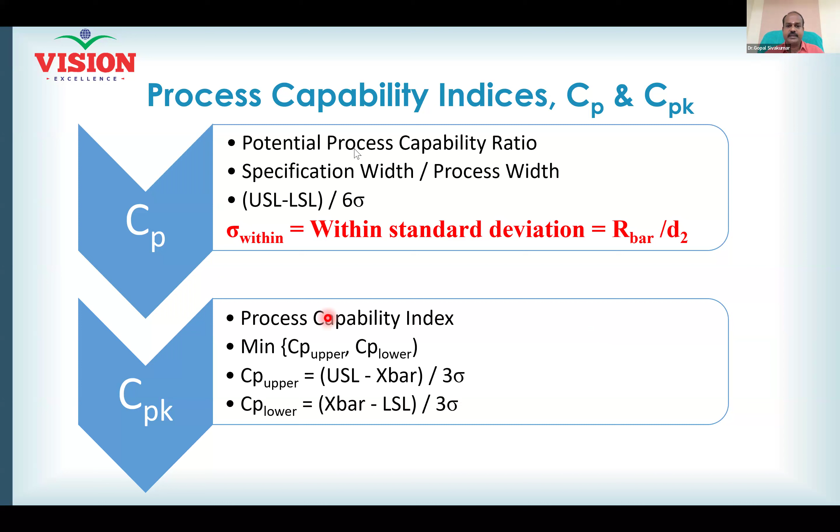If you can do anything within today, that's short term, isn't it? So within means short term. So if you are using within standard deviation, then your formulas can give only CP and CPK.

And now control limit has gone outside the specification limit. Can you see? Now process is not capable. In this scenario, CP will fall below 1.

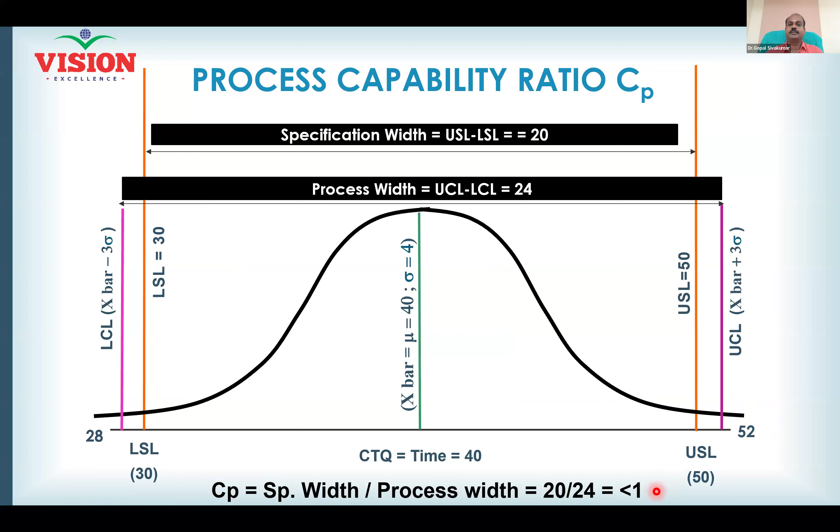And now process is capable. Why is it capable? Control limit is inside the spec. But now what happened? Not capable, because the process has got shifted. Can you see here? The process is shifting to the right side.

Now, even in this scenario, CP still gives 1.67. Since CP is healthy, it doesn't mean your process is capable. You should understand the position of your process and the position of your control limit. If my process is shifting, my control limit is also shifting.

So CP cannot be an accurate measure of capability. Please note, CP is only a potential measure of capability. What is the name of CP? Potential measure of capability. It is not an accurate measure of capability.

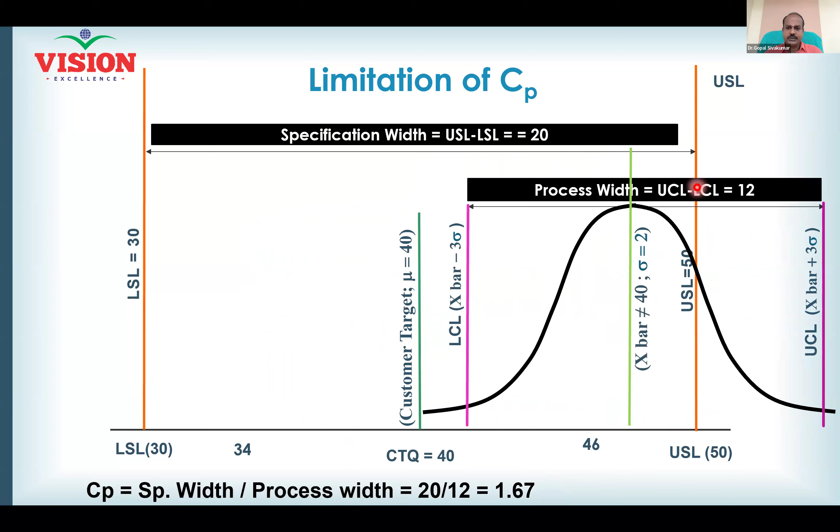So in order to measure accurately, we introduce another metric known as CPK. Here in my slide right now, I'm still showing you CP only, with the control limit overlapping the specification limit. What is the value of CP I'm getting? 1. When CP equals 1, the process is known as a 3 sigma process.

When CP and CPK are equal to 2, the process will be a 6 sigma process. Why do I call it a 3 sigma process? Can somebody answer? Because the control limits and specification limits are lying within 3 standard deviations, right and left.

Very good. Because both my control limit and specification limits are overlapping. In that scenario, the distance between the center of the process and the nearest specification will be equal to 3 times standard deviation.

Imagine this upper spec and this lower spec represent the size of the door, the size of the door in your house.

And imagine a person wants to enter through the door. He must be leaner than the door, yes or no? Yes. If he is bigger in size than the door, he can't enter.

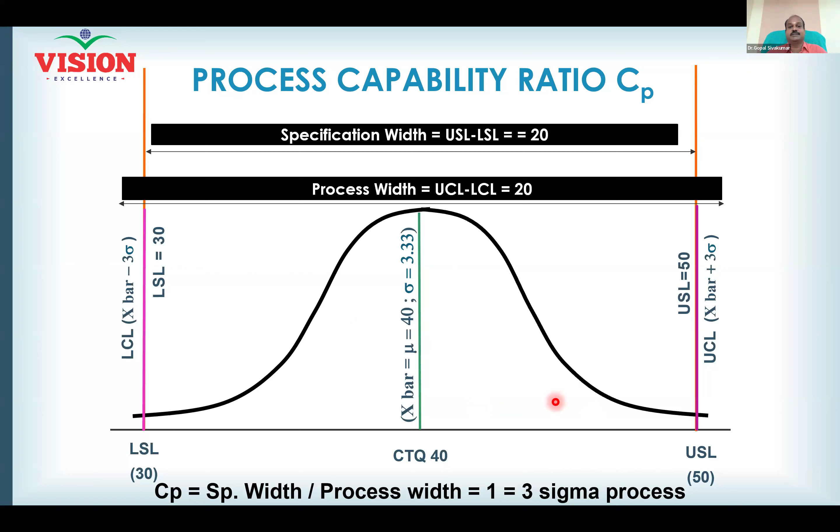So when I say person, I refer to 1 standard deviation. Your process standard deviation talks about the size of your process. Clear? Okay, so now it is about CPK.

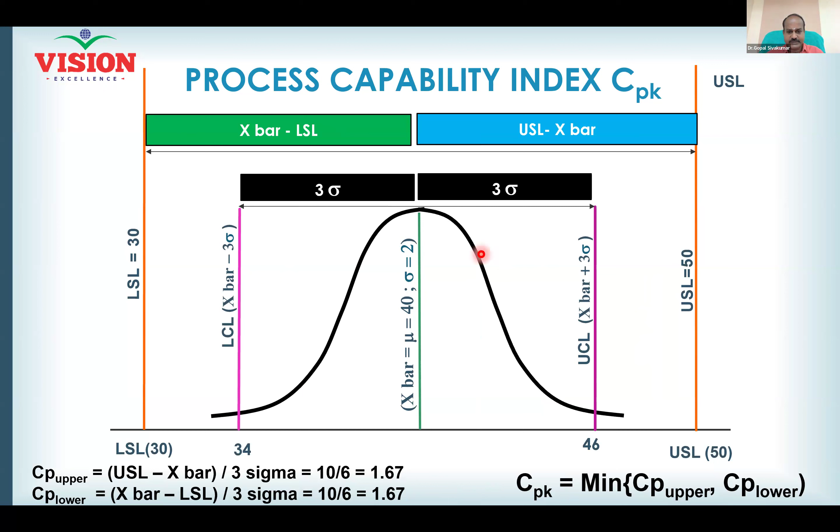When it comes to CPK, what we do is check whether our process is shifting to the right side or left side. When the process is not at all shifted, CP and CPK will give the same value. You can see process is not shifted, now CPK is found to be 1.67, CP will also be 1.67. But when my process is shifted, CP will still remain at the same value, but CPK will drop.

Can you see here? CPK means minimum of CP upper or CP lower. CP upper means the formula: USL minus X bar by 3 sigma. CP lower means X bar minus LSL by 3 sigma. So I get 2 different values for CPK. When you have 2 different values, you have to choose the minimum.

Which is the minimum here? 0.8. So CPK is 0.8, clearly confirming that the process is not capable in the long term.

The process is not capable according to the data, even in the short term. CPK gives a realistic estimate of the capability, not CP. CP fails to detect the shifting of the process, but CPK can even capture the shifting of the process.

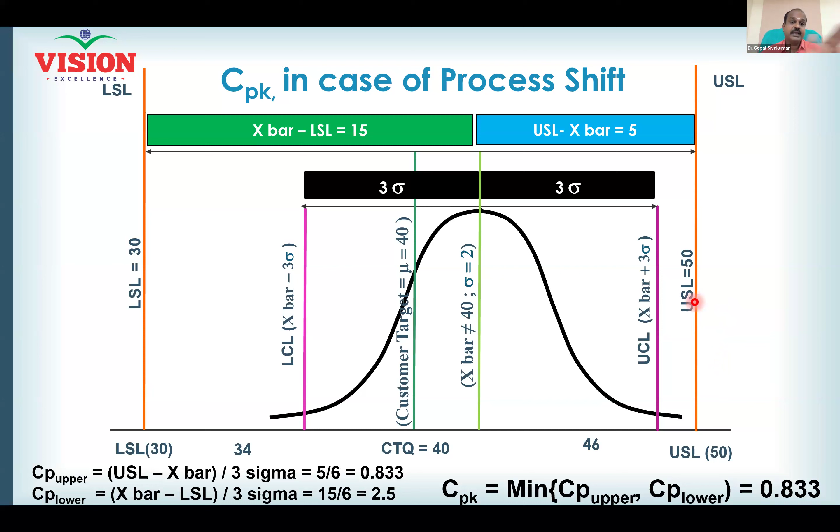All of you, do you understand why we need CPK? CPK measures the spread of the process and also the shift of the process. All right, so these are the conditions to be fulfilled.

First of all, this is the condition: CPK must be more than 1.67. If CPK is more than 1.67, you can declare the process to be capable. And if CP is more than 1.67, don't declare the capability without looking at CPK.

Then what can you do with CP? What you can say with CP is you can declare that your process is stable or consistent. If CP is more than 1.67, your process is under statistical control. Your process is consistent, your process is stable. You can use all these words: stable, consistent, statistical control. But in order to use the word capable, CPK must be more than 1.67.

If you have very good control, then you know what will happen: you will see that CP equals CPK. In an ideal scenario, your actual capability will be equal to the potential capability. So you can always aim for fulfilling this condition - what is this condition? CP can be equal to CPK.

If you look at, suppose it happens to refer to a CPK value, CP equal to 1.87 and CPK equal to 1.37. What is your understanding now? CP equal to 1.87, but CPK equal to 1.37. Can you see a difference of 0.5?

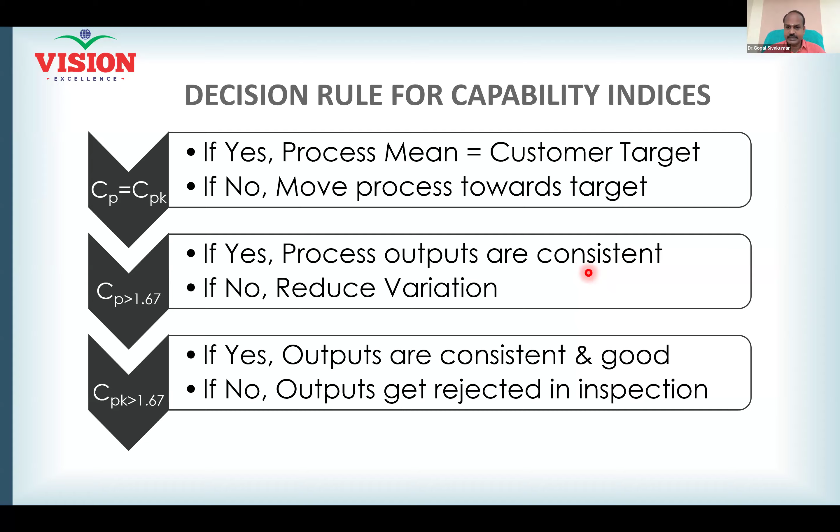And now some calculation example. You see, this is upper spec and lower spec given. It is an electronic manufacturing company. Current flow specifications are given as 100 plus or minus 10. So upper spec is 110, lower spec is 90.

And the process average and process standard deviation are available, and that leads to a CP of 2.22. But for the same data, CPK I get is 2... which one should I choose? The smaller one, so 0.66 is the CPK.

That means my process is capable or not capable? Not capable, not capable. And CP is not equal to CPK, so that means my process is shifted. So the action required is I should shift the process average towards the target.

And when I look at my CP, it's looking great - no action is required with respect to the variation. Process is under perfect control, but only thing is it is shifted. All right, and finally I look at CPK, which is very poor.

So what action do I need? I refer to the previous understanding - so I know that no action is required with respect to CP. So what action is required? I should only have to move the process mean towards the target.

But how can you move the process mean? You have to figure out. Suppose imagine our students' average marks standard is 80, but you all happen to achieve an average of only 65. What happened to my process mean? Shifted downwards, am I right?

Now I want to move the average towards the target of 80. Now what should I do? What should I do? I want all of you to score more - then only my average can move up, isn't it? Now what should I do?

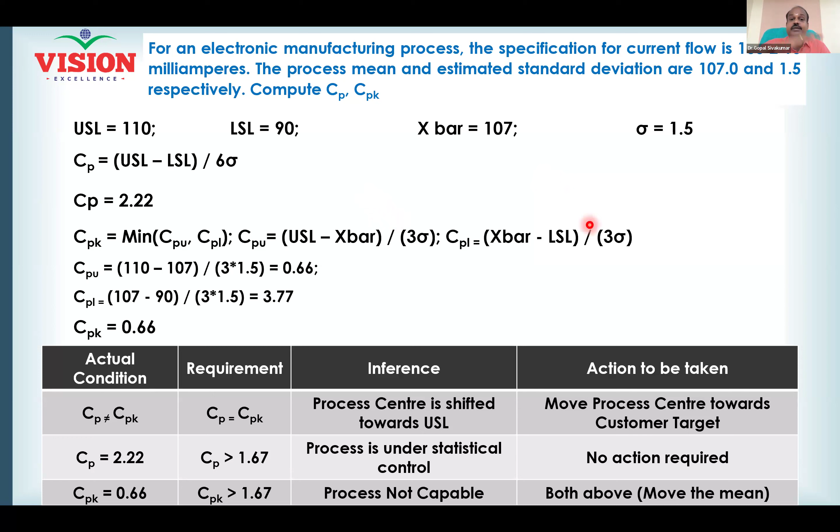I should increase the number of hours of the set classes. Probably the exam, mock exams - I should give more mock exams. Yes or no? So all these things can definitely push my average. So what needs to be done at your place, you need to understand.

Now another scenario, I'm not going to read out this, where CP equal to 1.11 and CPK equal to 0.666. Now what is your understanding? Both are under trouble now.

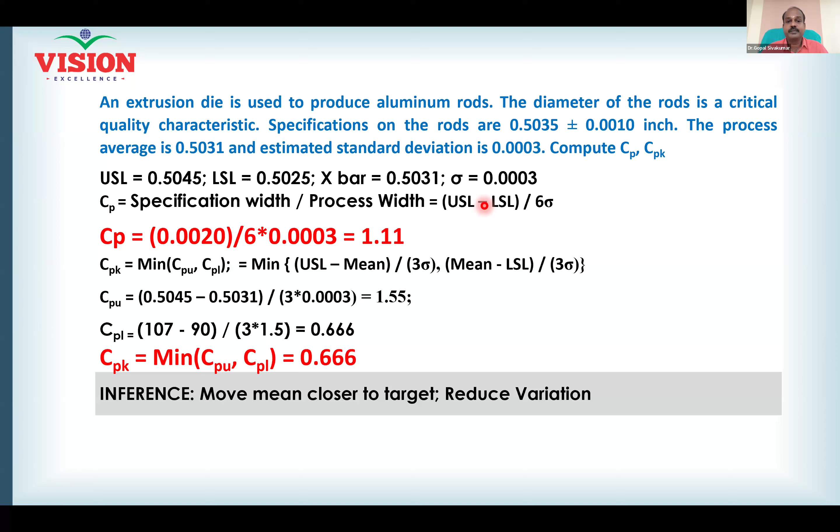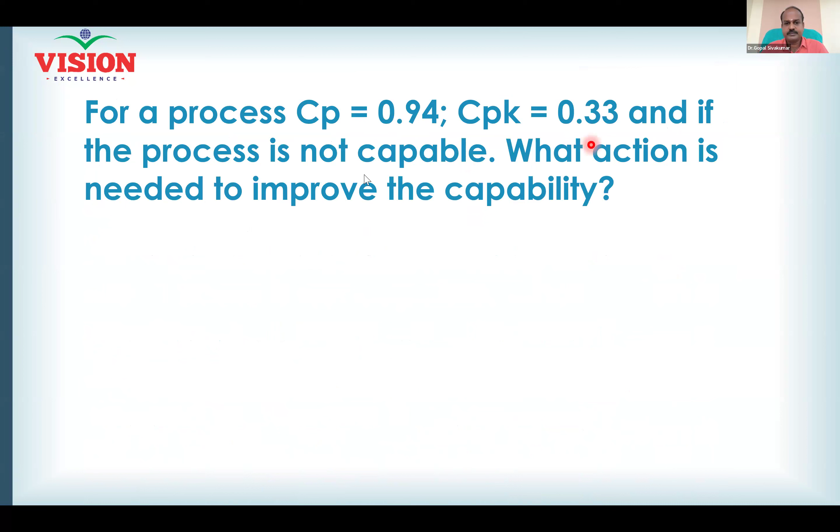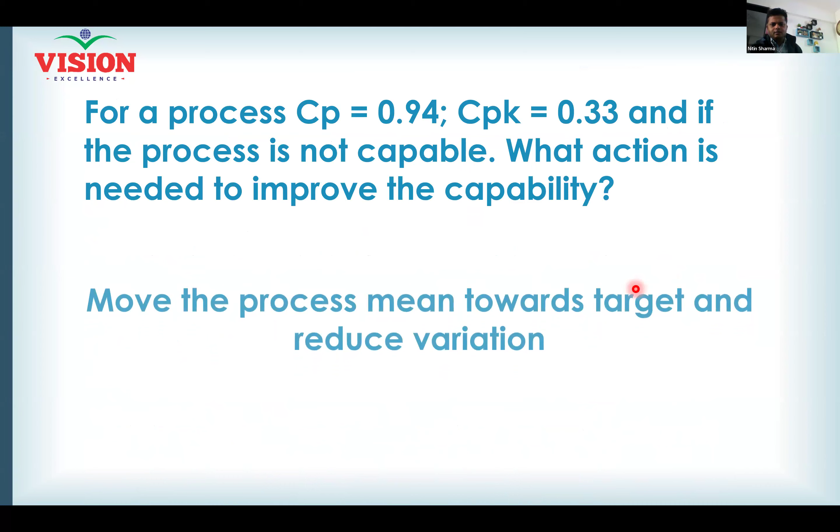What should I do? I should move the mean and also reduce variation. Very good. So now what is your recommendation as a consultant, as an expert? CP equal to 0.94, CPK equal to 0.33. What is the suggestion? Process is not capable. We should reduce the variation and also move all the readings near the mean. Move the mean towards the target. Very good. So you know everything about CP and CPK.

Now we just move on to PP and PPK. I'm showing two different cricket players. One is Shikhar Dhawan, the other one is Sourav Ganguly. Both are left-hand batsmen, both could hit well. But if you really want one of them to play for India, whom would you prefer? Shikhar Dhawan or Sourav Ganguly?

Shikhar. It's difficult, but if tomorrow's match is very important, Shikhar Dhawan is the right choice. Why? Because he is not only capable of hitting, his physical fitness is also good. In addition to the capability, past record, his current fitness is also important. So PP and PPK measure the current fitness also. Please understand.

Okay, and now for PP and PPK, look at the formula. Formula wise same, can you see? USL minus LSL by 6 sigma, that is the formula for PP. Again, similar to CPK, for PPK also you have PP upper, PP lower. What is the difference? The way we calculate the standard deviation is the difference. Earlier, what was the formula I gave you for CP? Within standard deviation, R bar divided by D2. Do you remember that? Yeah.

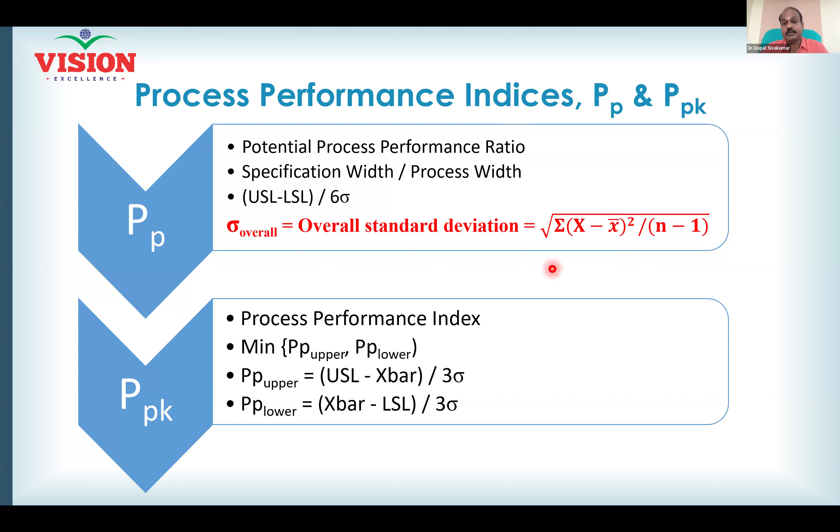But now I don't want you to use R bar by D2. I'll tell you what R bar is and everything, but now you should use this, which is known as overall standard deviation. Whenever you use overall standard deviation, you get PP, PPK. Whenever you use within standard deviation, you get CP and CPK.

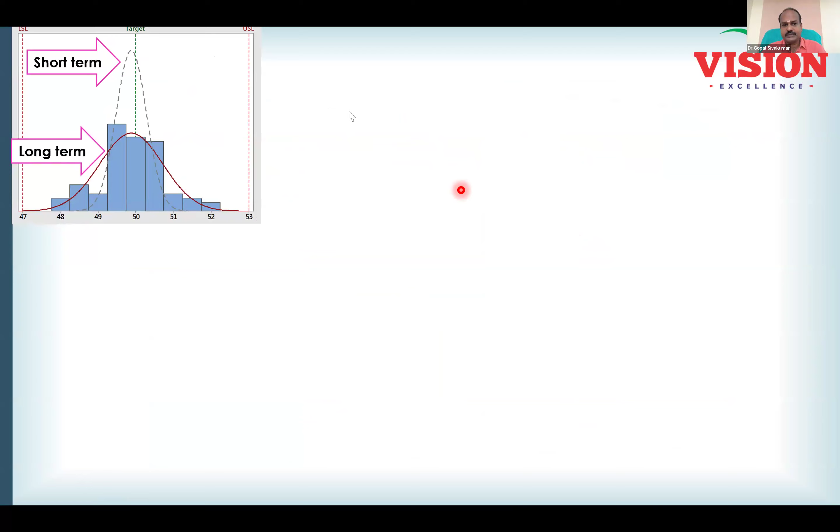And now the capability definitely depends on two things: the position of the center of the process and the variation in the process. Based on this, there are two types of capability: short-term capability and long-term capability. How can I calculate short-term capability? Using within standard deviation. How can I calculate long-term capability? Using overall standard deviation. Within the short term, we have some different standard deviation. I don't want to confuse you with too much information, so focus on understanding the within and the overall. Later we'll talk about these two, preferably at the MBB level.

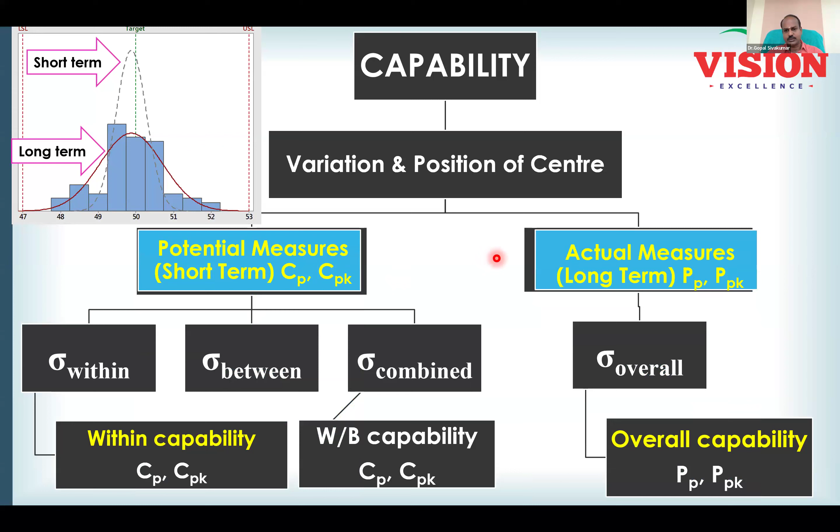So now if you use within standard deviation, you get within capability - this is normally referred to as CP and CPK. If you use overall standard deviation, you get overall capability - this is what we normally refer to as PP and PPK. The performance indices are here on the right side, the capability indices are here on the left side. Sometimes we call CP, CPK as short-term measures and PP, PPK as actual or long-term measures. Now here is the formula.

Now we are going to look at a case study. Prior to that, please note, whenever you want to conduct a capability study, make sure your process is under the state of statistical control. Then only it is advisable to conduct the capability study. What is the requirement I'm telling you? If you want to calculate CP/CPK and PP/PPK, the prerequisite is your process must be under the state of statistical control, which means if you plot a control chart, all the points should appear inside the control limit. If that is not happening, conducting a capability study cannot be accurate.

Imagine a USL and LSL - no, control limit. In a control chart we refer only to control limit, not USL, LSL. So in the control limit, if all points fall inside, then your CP/CPK and PP/PPK can be accurate. Otherwise they will be inaccurate. What are you going to do with inaccurate CP/CPK and PP/PPK? Useless. So don't fall into that situation. Always check whether the control chart is healthy. If the control chart is healthy, conduct a capability study.

Imagine right now how many people are attending the meeting? It shows 21, isn't it? Yes, and the batch size is somewhere around 35. Now how many people are absent? 14. Now tell me, do you want to allow the 14 candidates also to write the exam? Strictly speaking, should we allow or should not we allow? Strictly we should not allow, because they have not attended the class. They are not in proper control.

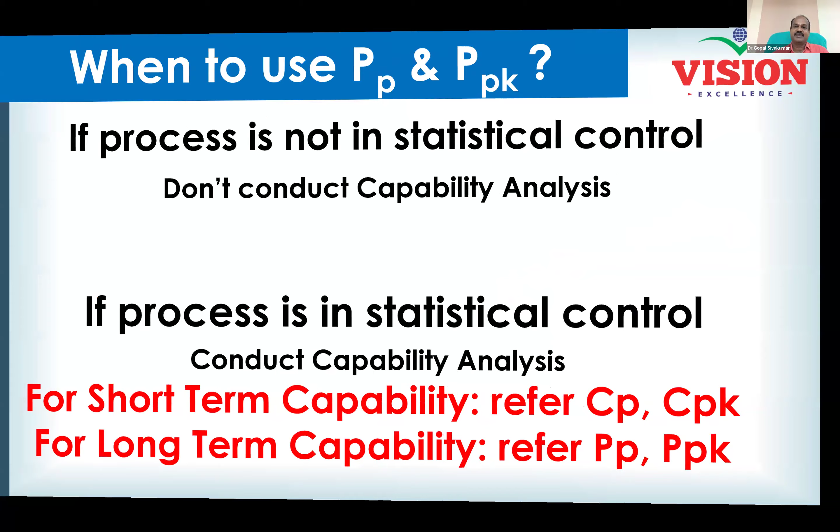If you are having the habit of scoring above 90, absolutely you don't have a chance of failing at all. We are not talking about passing and failing. We are now talking about the toppers, whether I can be a topper or not. We never fall into the category of passing or failing.

Now, one case study here. A company has to produce parts. The process is coating. A layer of coating is required, and after coating, the coating thickness must be 50 microns. What is the target? 50 microns. Customer gives a specification of plus or minus 3, so 50 plus or minus 3 microns. Very narrow spec. What is the upper spec now? 53. Lower spec is 47. Now you have to have a very, very effective level of control so that your products can always stay inside the specification.

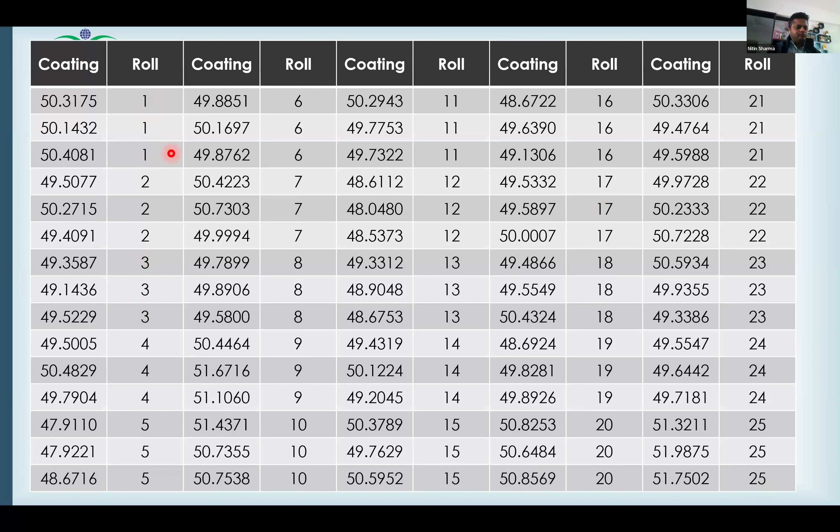So now you are collecting data. See here how the manufacturing is happening. The raw material comes in the form of a roll. Once a particular roll is loaded, you are able to produce 5,000 parts. One roll can give you 5,000 parts. Once the roll is exhausted, you have to load another roll, roll number 2. Can you see the roll number keep on changing? 1 to 2, 2 to 3, 3 to 4. That means you consumed 25 rolls. Totally, how many parts do you produce now? 25 into 5,000. So totally, 125,000 parts you produced.

Now, in this scenario, you want to know your CP, CPK and PP, PPK. So now, please note your data collection plan. Now, loading 25 rolls, how much time it might take? Imagine, and now 25 rolls were processed. This is a considerably good period of time.

Your data is collected. From every roll, you have taken 3 samples. Can you see here? Every roll, you have taken 3 samples. The 3 samples taken together from every roll is known as a subgroup. So 25 rolls, you have 25 subgroups of data. Each subgroup has got 3 samples. The 3 is known as subgroup size. Totally, you have 75 data. The 75 samples represent 125,000 parts.

If there is a problem with the 75 samples, there is a big problem with 125,000 parts. Am I right? Yes. If there is a problem with the average of the 75 data, definitely there is going to be customer complaints in the 125,000 parts. So the overall average is very crucial for you. All of you agree with me?

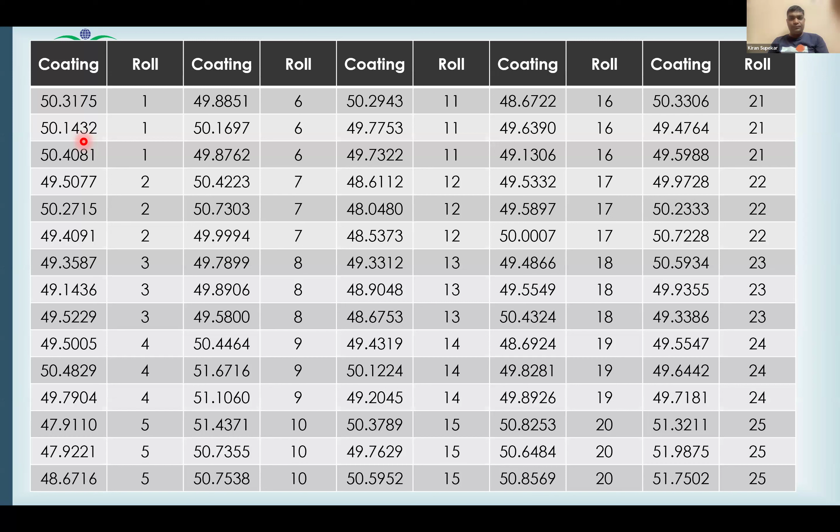Moreover, if you look at the subgroup, you only have 3 data. Please note, you don't have much. When you have lesser number of data, in the control chart itself we have taught you: when the number of samples is less than 8, you go for X bar R chart. Am I right?

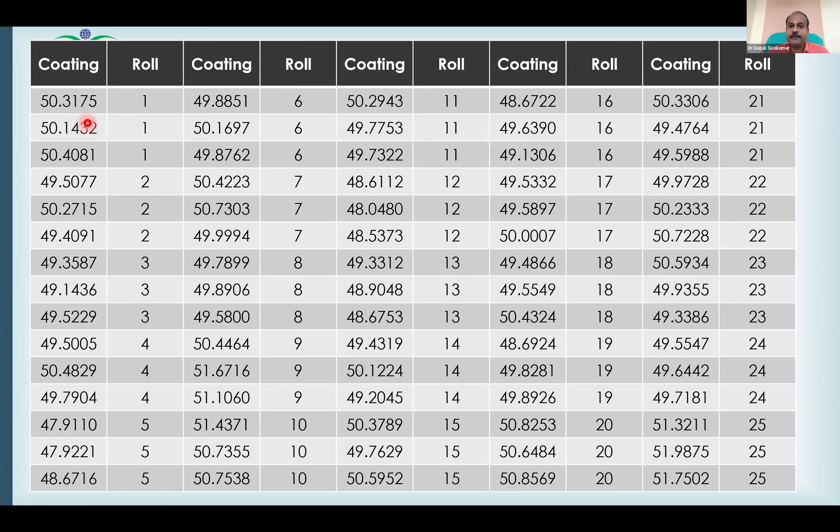Same manner, in order to understand the variation, calculate range, not standard deviation. After calculating range, you can convert the range into standard deviation. All of you are with me so far? The formula used to convert range into standard deviation is R bar divided by D2. What is the formula? R bar divided by D2. That's all, now we proceed with the calculation.

Number of subgroups equal to 25. Subgroup size equal to 3. Total number of data, 25 into 3, 75. Now for every subgroup, calculate the range. Formula for range is maximum minus minimum. How many ranges are possible? 25 ranges are possible, am I right? Yes sir. This is known as subgroup range.

With the 25 ranges, can you find out R bar by D2? R bar is summation of all the ranges divided by 25. Can you do this? Simple, no? Yes sir. Now R bar is available. Now what is D2? D2 is a statistical constant, a table is available.

For a subgroup size of 3, the value of D2 is tabulated as how much? 1.693. Up to a subgroup size of 25, D2 is available, you don't have to worry. Even though people say go for a sample size of 30, the normal practice is up to 25 only, and that is tabulated.

Now use this 1.693 to convert your ranges into standard deviation. The resulting standard deviation is known as within standard deviation. All of you understand how to calculate within standard deviation? Yes. The within standard deviation actually talks about what is happening inside the subgroup.

Clear? Now, if you use this within standard deviation, you will get CP and CPK. Look at your CP, CPK. You all know the formula. What is the formula for CP? USL minus LSL divided by 6 times sigma.

But in the place of sigma, which value should I substitute now? 0.4139. Substitute 0.4139 and I will get a CP value of 2.46, CPK value of 2.37. Extremely healthy, am I right? Yes sir, no rejections. I can't see any rejections out of this; in each of the 5,000 parts, there is no rejection at all.

How many of you agree with my statement? I agree sir, because I have a very good CP-CPK value. Very good. And now I want you to calculate overall standard deviation. If you want to calculate overall standard deviation, how many data points do you have?

75 data points. Simply type all the 75 in Excel, single column. Calculate the standard deviation, and now look at the standard deviation, how much it is? 0.8384. In comparison to the within standard deviation, can you see what happened?

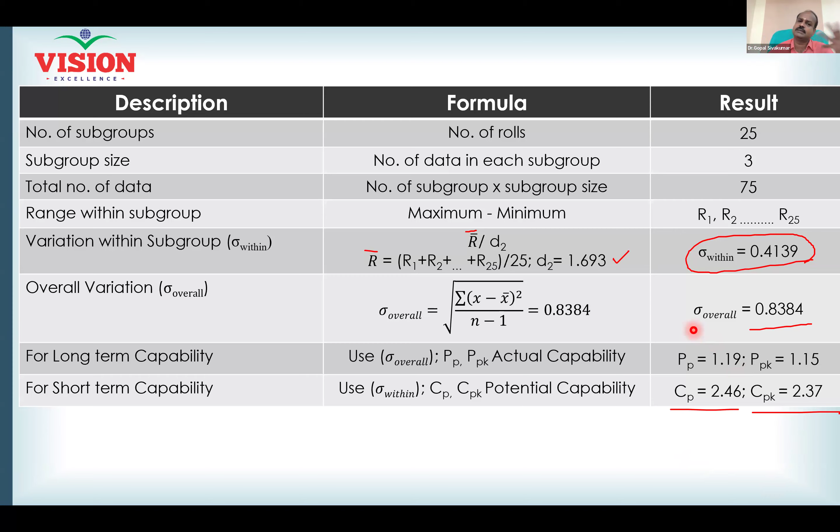Now, will you conduct a capability study? You are not supposed to, isn't it? According to the understanding now, you are not supposed to conduct the capability study. Why? Because the results are not going to be accurate, they will be inaccurate, isn't it? Yeah, they will be inaccurate.

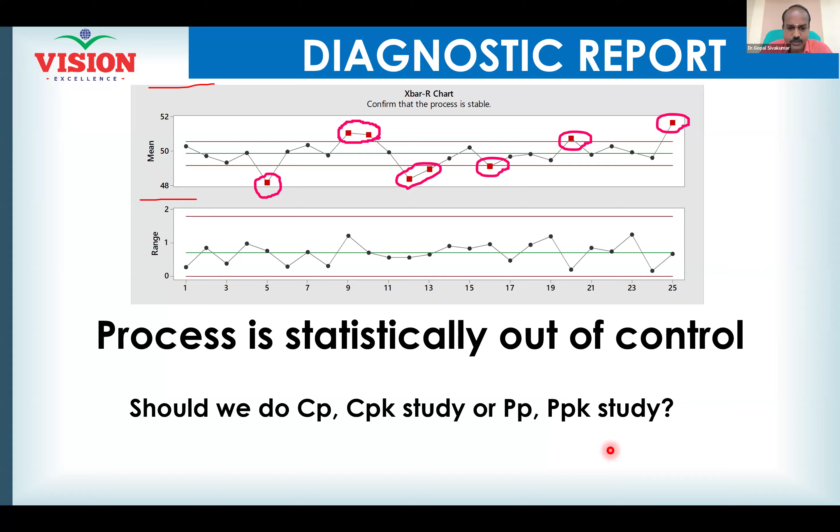That's the message. Now this is the Minitab report for the same set of data you see here: 1.19, 1.15, 2.46, 2.37. Everything we did manually, we got the exact result. A process operating in this manner currently, you see a good control.

Can you see here? Good control, the dotted line. But in the long run, gradually it is stretching outwards. The control limits are moving outwards, and that's the red color one. Red represents long-term performance, the dotted line represents short-term performance. Both of them are more or less inside the spec only.

But the tendency to cross the LSL on the left side is very high, and that's why you see the PPM of 393 is expected. Currently, PPM is how much? Zero, because of higher CPK. But in the future, PPM is expected to be 393. If you can't tolerate this 393, you must establish better control. Bring additional control into the process so you can avoid the 393. Otherwise, you have to face this 393 ppm. Clear?

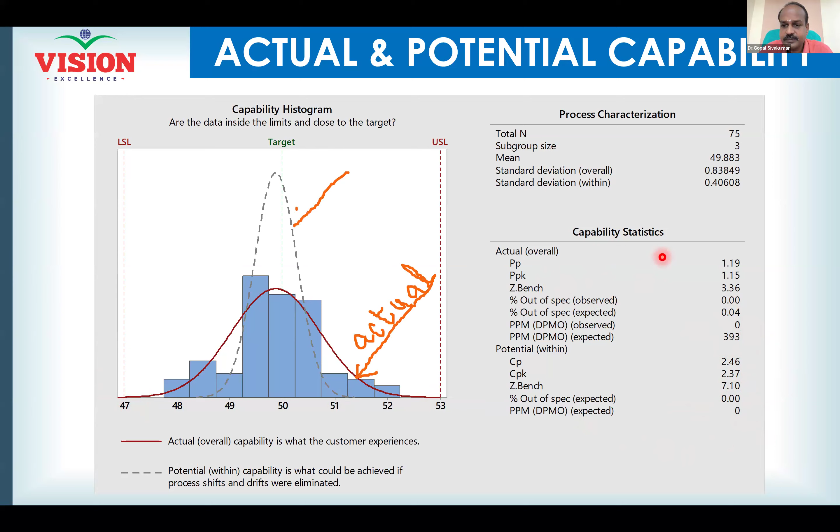Now, do you understand what is CP, CPK and PP, PPK? The same thing in another format - I will show this in Minitab so that you will understand. Likewise, for any scenario, any kind of data, whether it's about coating thickness or diameter, you can certainly do the analysis. Just 2 minutes in Minitab will show you how you can conduct the case.

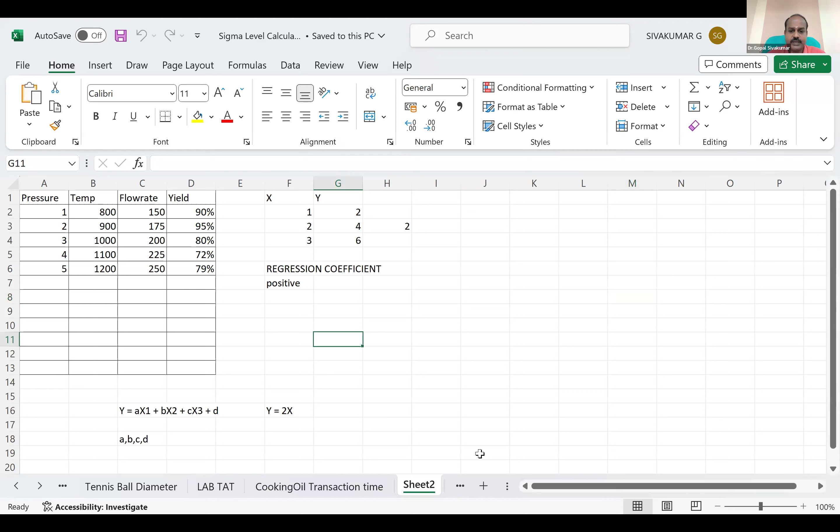So I'm just showing the Excel file. All of you, can you see the Excel file? This file I've already shared with you - the Sigma level calculator, hope everybody retains that. It contains a lot of data, so I want to refer to the data which I currently discussed with you. The file name should be coating thickness. Let me check - can you see coating thickness, all of you?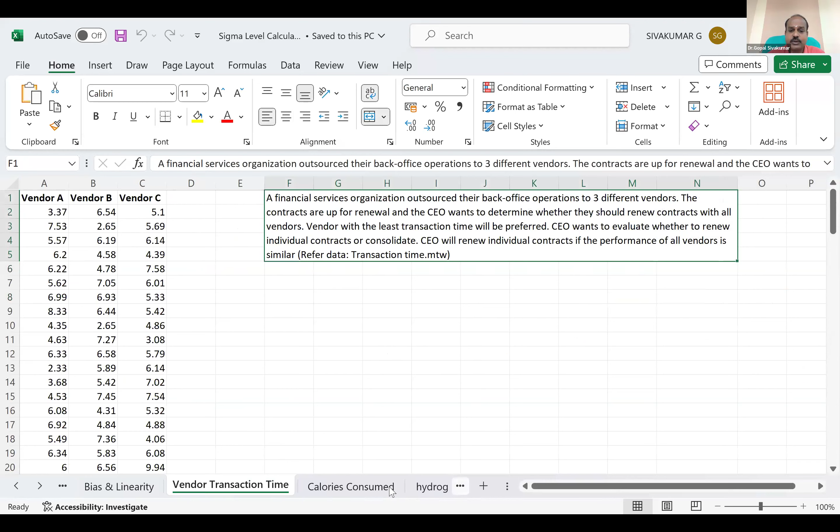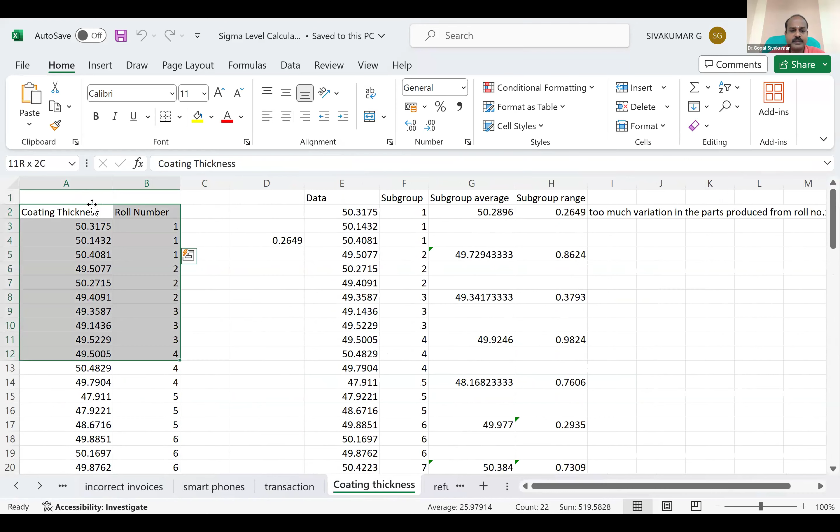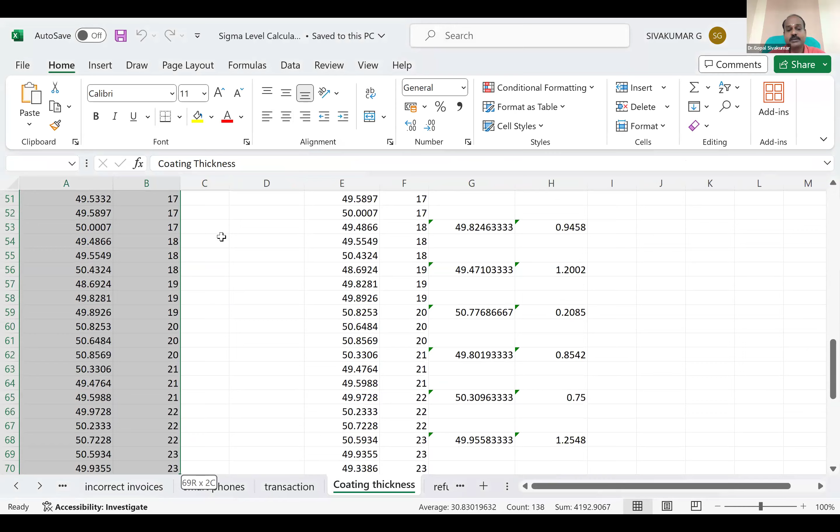Yeah, see here, the 75 data points are available here - coating thickness with roll number data. All the calculations I have done manually. All of you can check and understand, try to understand how the calculations are done manually. But right now, what I'm going to do is just select the data points.

Let me share with you the Minitab. You can see the Minitab screen now. I'm just pasting in here - oh sorry, let me paste in the gray bar. So coating thickness is available in column 1 and roll number available in column 2. There are 75 data points. So what I do is I just go to Stat.

I just go to Quality Tools - can you see a capability analysis? Stat, Quality Tools, Capability Analysis, and choose Normal. Can somebody read the description? 'Determine how well your process output meets customer requirements when your data are reasonably normal.' Very good, I click that.

And now where is my data? Data arranged in single column, which is C1 - double click. Subgroup size is available in C2. Now your lower spec - what is your lower spec for the problem? 47. And upper spec, 53. You give this information and then give OK.

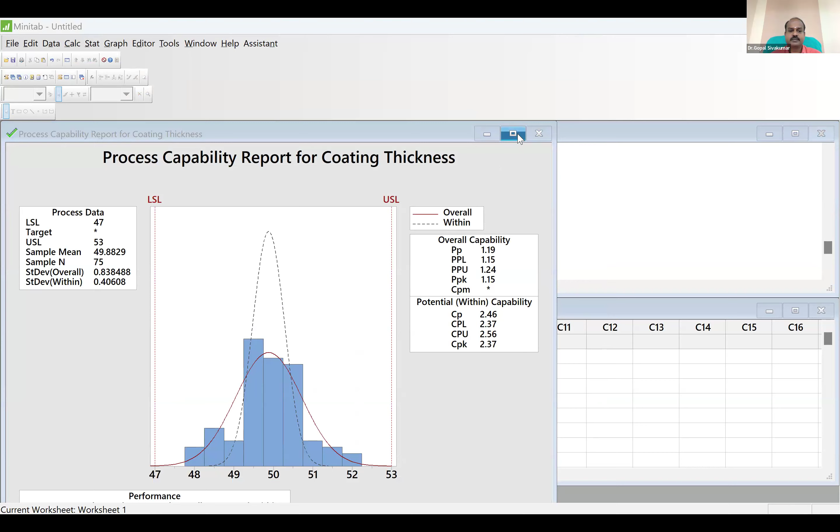And now it is throwing you the report. Can you see here, all of you? Same results, right? Can you see the report? The expected PPM is how much? Expected PPM is 393. Which side are the rejections more, LSL or USL?

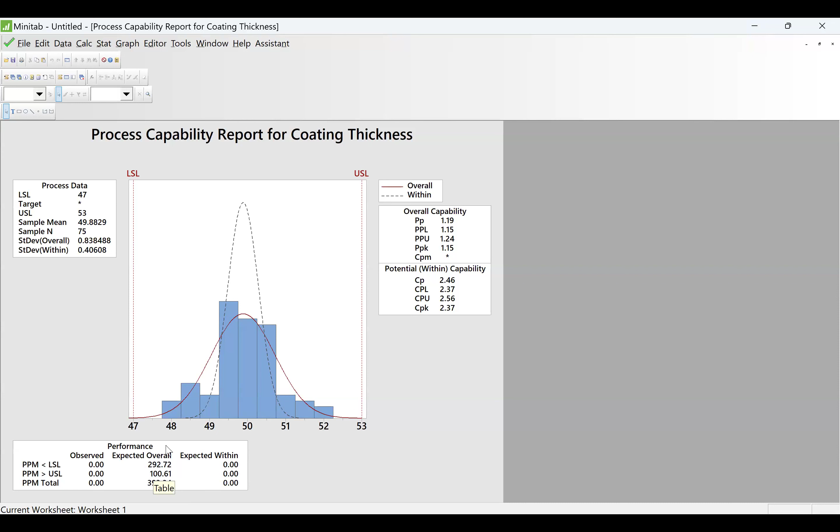LSL. But currently, how many rejections on the LSL? No rejection, can you see here? Currently no rejection on the LSL, no rejection on the USL. Even though absolutely there are no rejections on the LSL or USL, still in the future 293 on the LSL side is expected, and 100 on the USL side is expected. All of you, do you understand how we get this 293 and 100?

Even though there is no rejection in the short term, it doesn't mean that in the long term also there won't be any rejection. In the long term there can be rejection. We are estimating that based on the tendency of shift and the tendency of variation. If the tendencies are low, then in the future also you will not have any rejection.

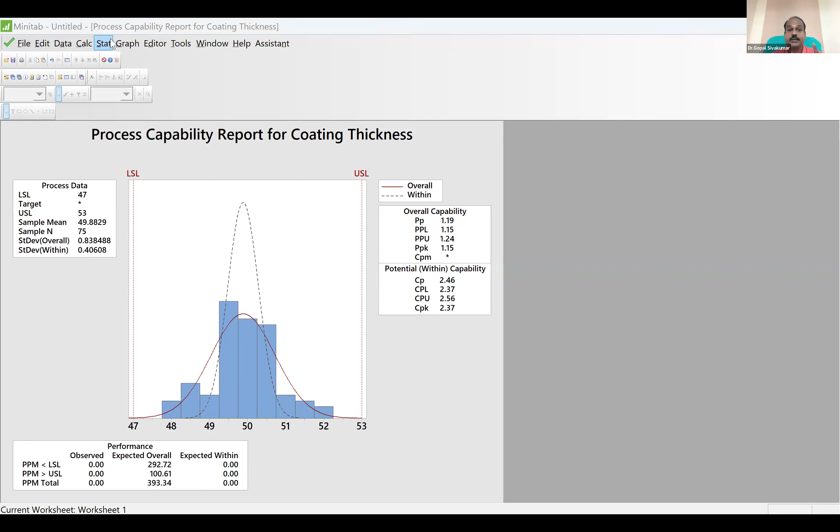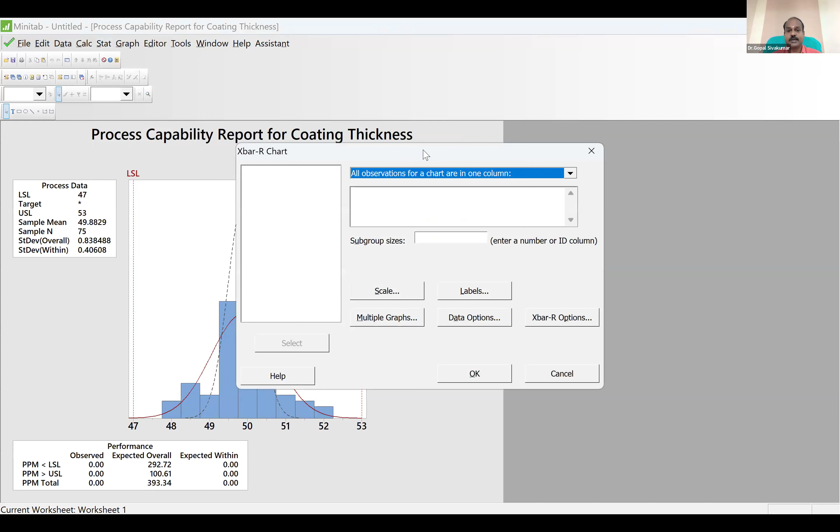So as I already told you, for any process, before doing the capability study, you must check for control. So what kind of control chart can I plot here? X bar R chart - so I am going for an X bar R chart. Where is my data? Data in single column, this is the column. Subgroup size is 3, and now I say OK. See here what happened?

Now your report is... come on, tell me, what happened? Your report is inaccurate, isn't it?

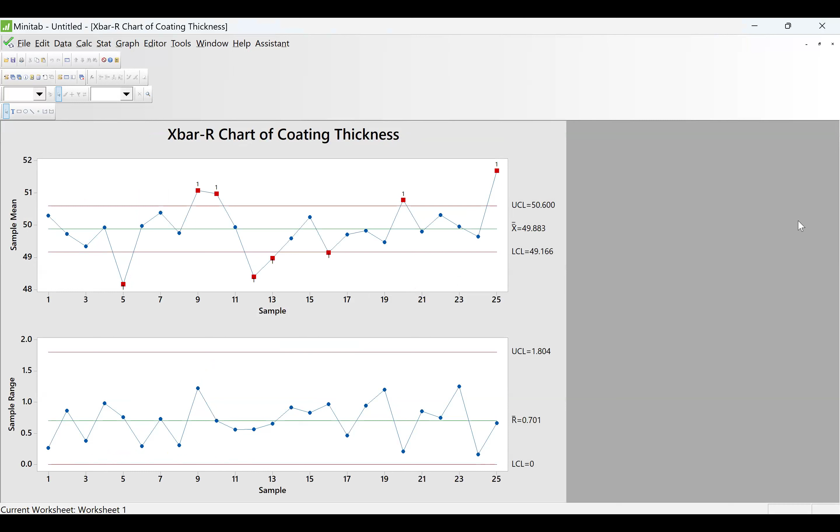Moreover, please note, your specifications are very high. That is the reason why your rejections are expected to be low. But even then, you can definitely improve the process further, and you can remove all these out of control points. That is the message. So that's how you should do it.

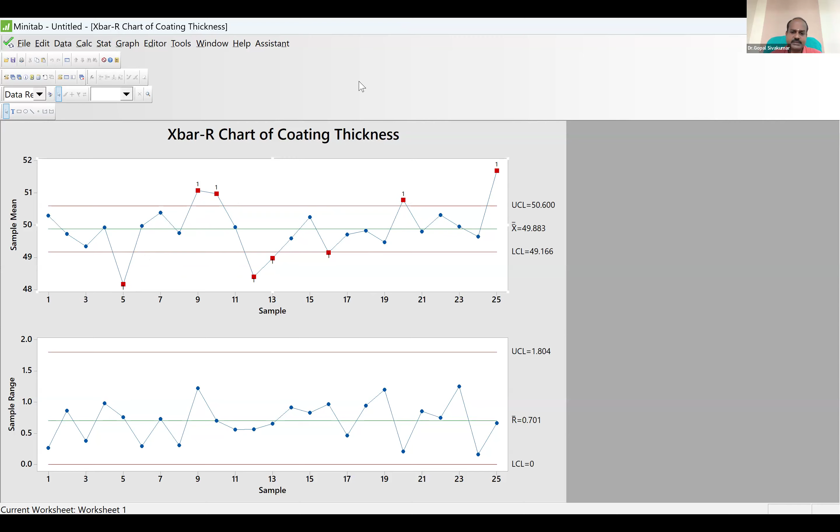Okay, so any questions, please ask. Sir, in the last point, if we are saying that we remove those outliers, that is approximately 25% of the existing data in this particular plot. So, correct. I mean, we ourselves are just to remove the outliers at the cost of putting 25% of the data out. Aren't we actually, isn't it unethical?

Yeah, true, definitely true. See, actually, outliers, you can't just like that remove from your analysis. Instead, what you need to do is you should find out the reason for the outlier in that particular point, which particular day the samples are collected, right?

And what are the conditions for that particular sample? Is there anything abnormally wrong? Can some action be taken? And can we identify the root cause? And then we have to fix it. This is the way, actually, each outlier requires some attention to the process.

That's how we should do it. But for the sake of some urgency, sometimes in business, we simply remove all the outliers and then perform the analysis just to see a healthier CP/CPK, right? But definitely, even though we got a healthier CP/CPK, still our process can be in a much better state of control, which we fail to do.